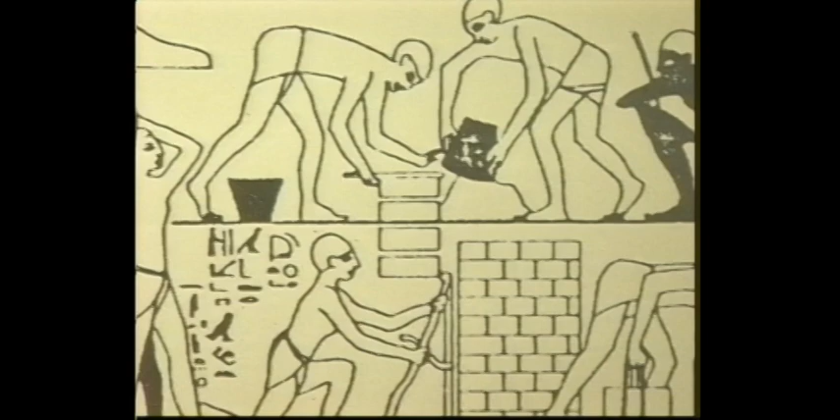This inscription reflects the historic depth of earth architecture. Nearly 5,000 years ago, builders here mixed soil and water, formed them into bricks, and dried them in the sun. This earliest and most widely used system of earth building evolved in sophistication and has created monuments which attest to the magnificence of what could be done with earth.

With the onset of the Industrial Revolution and the sudden appearance of towering giants of steel and glass, these treasures of earth architecture were filed away as relics from the past.

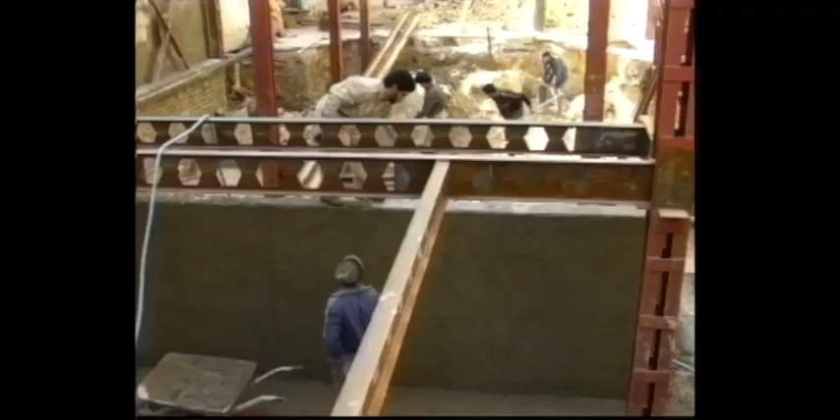Unlike the West, cities in the developing world had modernization thrust upon them without the benefit of long-term planning. Infatuated with the power and versatility of Western building technology, indigenous people began to look down upon their vernacular traditions as being symbols of their underdevelopment.

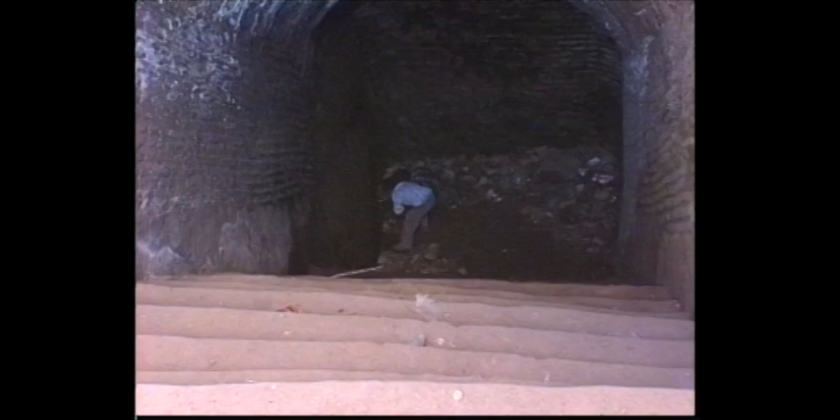Underground cisterns, with the thermal insulation of earthen material and the natural refrigeration of the wind catchers, store the cold winter rain, and in centuries past quenched the thirst of desert caravans in the summer heat.

Khalili wondered if these age-old techniques could be revitalized to address the shelter crisis and concerns for the depletion of our natural resources. In Iran and many places of the world, I saw that unfortunately the most beautiful earth architecture had been inundated, had been destroyed by modern type of architecture that was steel and concrete, and so inappropriate for the environment and the place, because people were all impressed that these were what the West has created, and they saw that as a symbol of progress. Therefore, they blindly imitated everything.

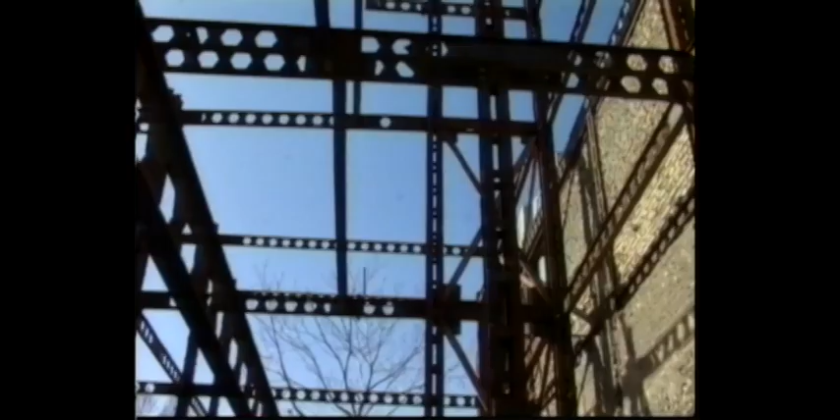Structures made with steel and concrete are generally unsuited for harsh desert areas because they create oven-like interiors in the summer days and provide too little insulation against cool nights. To make them viable requires machinery that taxes environmental and financial resources.

Earth homes, however thermally efficient, were plagued by other weaknesses. Main problem with the earth architecture was erosion in rain and snow, and of course earthquakes. And I was inspired for years by the possibilities of firing these buildings to become monolithic structures.

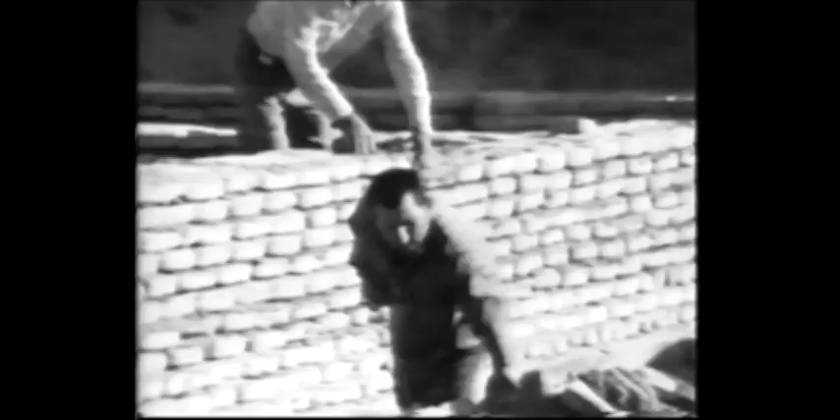And I went after these dreams until I came across a kiln, a brick kiln, a ceramic kiln that was standing there for centuries because the kiln was fired and glazed and it could resist. Therefore, the solution, the answer to what I was searching for years, was already at the turn of a road in a village.

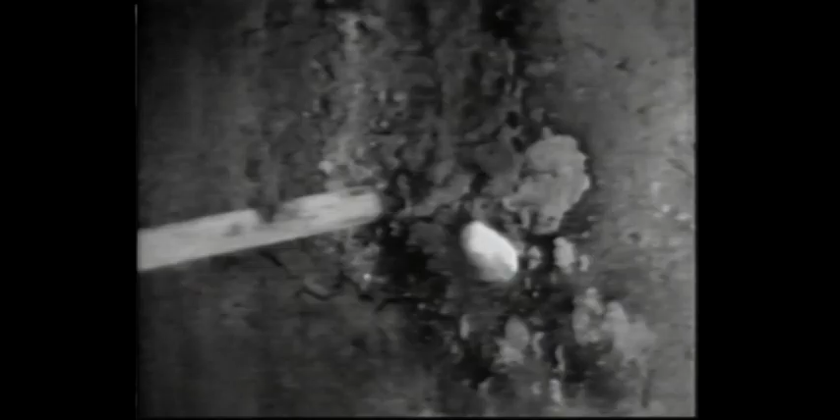After experimenting with the firing of small existing homes, Khalili worked with master masons to construct a 10-room school entirely of adobe bricks. Employing the available local technology, they used gravity-fed oil burners to fire the school for several days. This fired ceramic school has been in use for more than a decade.

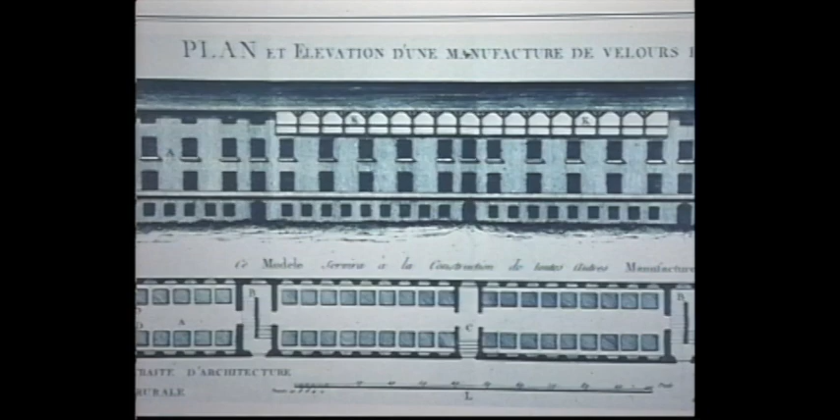The quest for the validation of earth as a viable building material can also be found in France. The 18th century pioneering architect François Cointeraux used the technology of his time to refine a system of building with earth called pisé, today known as rammed earth.

Mixtures of earth were pounded under pressure between wooden forms. The forms were removed, creating thick-walled structures. Driven by the enlightened goal of the French Revolution, Cointeraux envisioned rammed earth as a solution to the problems of building for the masses.

However, the very accessibility and simplicity of earth building posed a threat to the established practices and interests of his contemporaries.

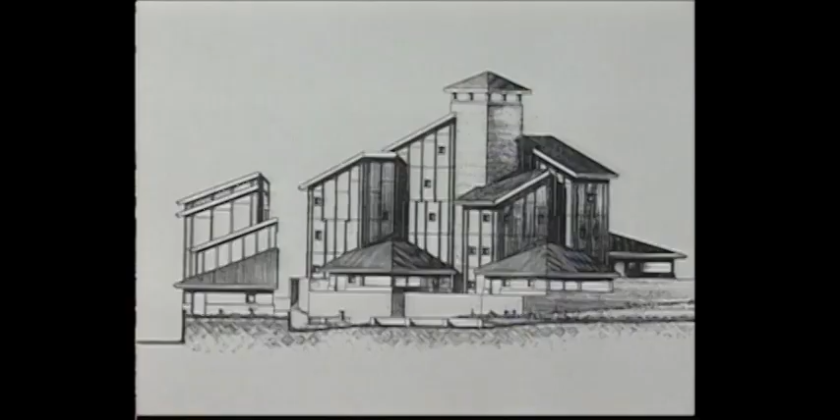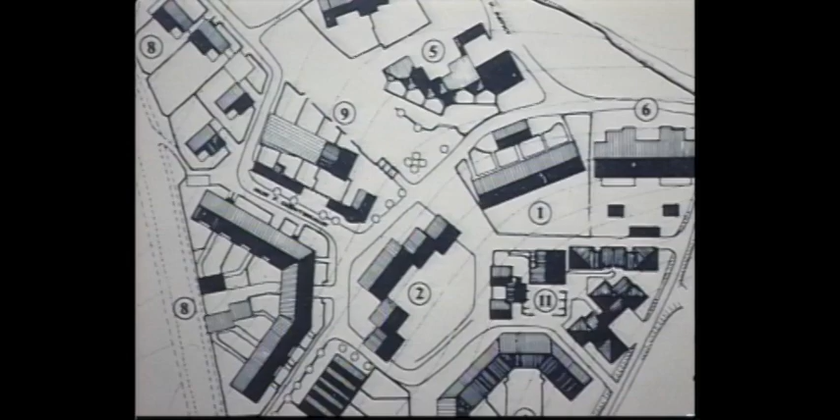When I was in the process of preparing the exhibition, then I remembered that and I said, we must build something here. It's not enough to say and to show that Earth has a future. We must demonstrate it. The Domaine de la Terre complex was designed and realized through the efforts of CRAterre, the French Center for Research and Study of Earth Building at the School of Architecture in Grenoble.

We became aware that without the industry, earthen architecture would go nowhere, except on a village level, etc. And this is quite new as well in history. This temperate region, subject to rain and snow, provides a working laboratory for experiments with improved earth technologies in order to overcome the drawbacks of climate and soil limitations.

These compressed earth blocks are quite familiar to many people - they're unfired. That means bricks produced by industrial means, extruded, don't have to be fired anymore, nor dried. Yet they have exactly the same characteristics as a fired brick, meaning 50% less energy for exactly the same product.

In this house, a sheet of glass in front of the earthen walls creates an insulating air trap. The sun's heat is absorbed into the walls by day and is re-radiated into the house by night.

What we can say here is that this architecture, its aesthetic, is quite the common one of the local architecture we can find in other neighborhoods. This is very important, in fact, because it demonstrates that architecture made with earth can be very common architecture, not a specialized architecture.

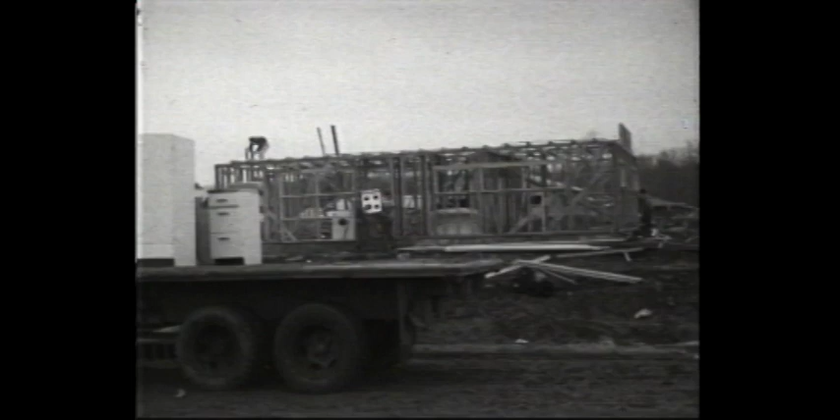Whereas the Groupe CRAterre is inspired by a rich tradition of earth architecture in France, European settlers in North America relied upon resources like timber to fashion homes in familiar forms, laying the foundation for a rapidly developing industrial society.

These are the 36 men who built this house. Another day, another 40 houses.

And yet, tucked away in scattered corners of this nation, there are various examples of earth architecture that hark back to the earliest indigenous inhabitants of this continent.

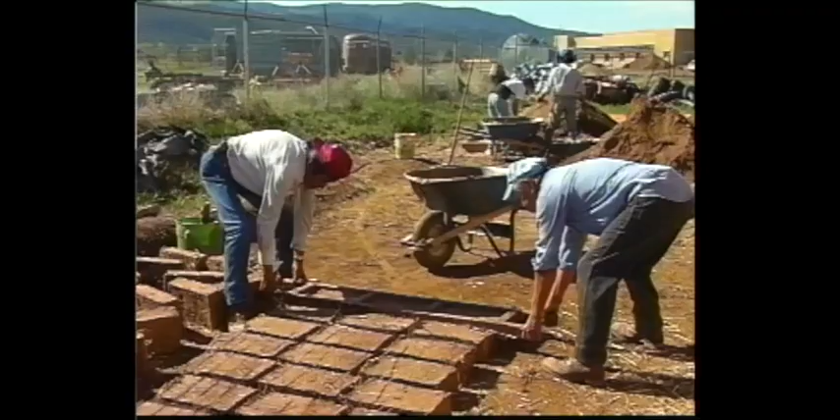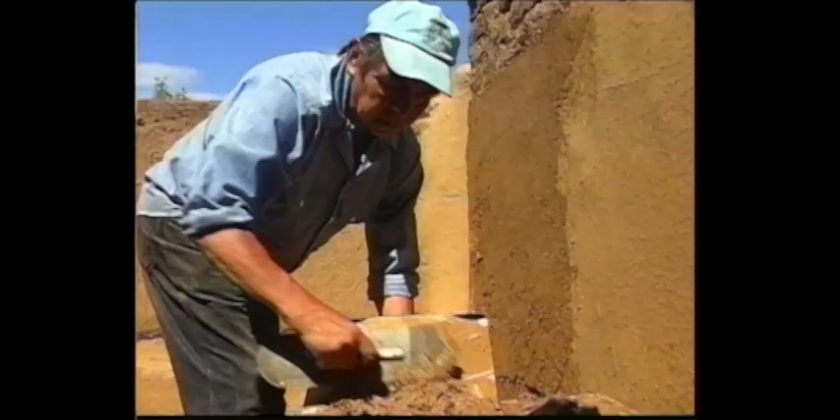For the adobe houses to live on, we have to take care of them like you would take care of a child. You clothe a child; we plaster the adobe houses so they can stand up.

Now we're going to go inside and I'm going to let you see the house that we had renovated.

Here, when you live in a house, it's almost like part of you because you live in it and it lives with you. If you keep the house warm, it'll keep you warm. And it's almost like if you die, the house will also die with you.

When you build a house, you build it with what you're actually standing on. Once upon a time, maybe there might have been a house there also, but the recycling of adobe material is almost like building what had been there once upon a time.

And here we find another authority, Mr. Norman Denny, Vice President for Materials of Levitt & Sons.

Mr. Denny, we see that you're using asbestos cement siding on your homes. Can you tell us why? Yes, these sidewalls help us create distinctive and attractive homes. They have a long life and a low cost of maintenance. And first, last, and always, our customers like them - and what they like, we like.

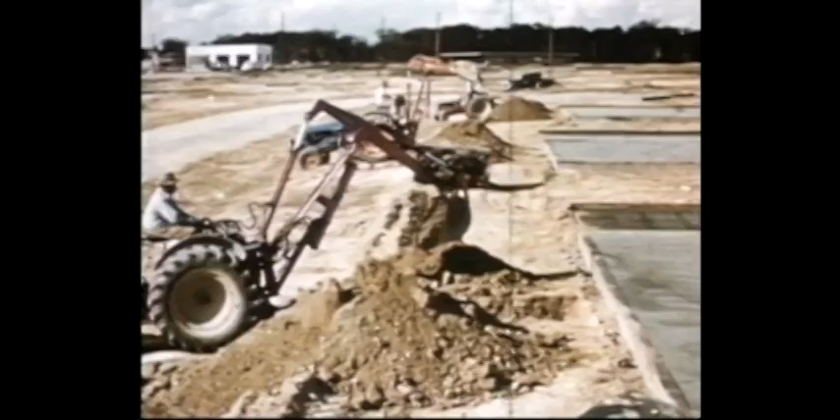In post-World War II America, the preference for single-family homes mushroomed. Rising to the challenge of this demand, the forces of industry and technology were harnessed, opening markets for the entrepreneurs who promoted newly synthesized building materials and the tradesmen who built with them. Ancillary enterprises such as insurance and mortgage banking became the backbone of the booming economy, creating a standard of living envied the world over. This money, the savings of all these people, when put to work in this way, benefits everybody. The butcher, the baker, the candlestick maker.

In the United States, a culture of consumerism and a misperception about the viability of earth hinder its potential acceptance as an alternative building material. There are many economic interests who see it favorable for their position not to have very much earth building occurring in the United States. That's the lumber industry, and in a major way, the cement industry. This is where their influence has affected the codes, because in these codes, earth walls are engineered as cement walls, courtesy of the cement industry.

One of the problems about adobe is that it's not considered a, quote, legitimate building material. In other words, by Western industrial standards, it's supposed to be soft. It's supposed to be so soft that it's dangerous to live in it.

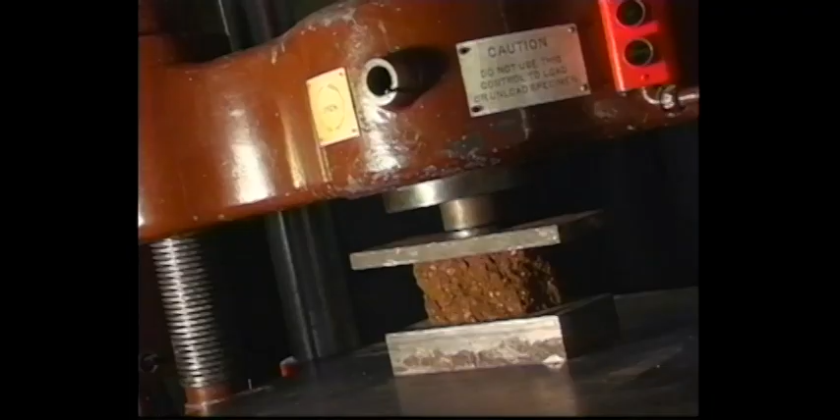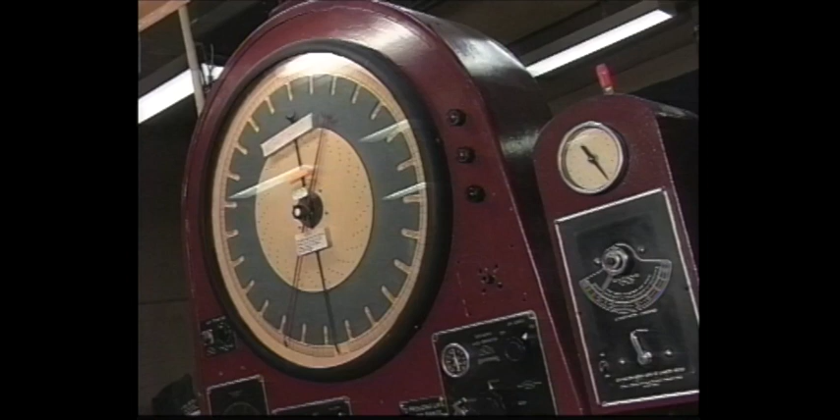This machine makes a compression test of adobe blocks. This represents the types of forces that are placed upon adobe blocks in an actual building. These would be the forces of the roof weights, of the weights that are induced by earthquake and wind on the building. These kinds of tests are what we need so that we can feel much more confident in using these materials.

Now, another test that's used is to take an adobe brick and subject it to tremendous pressure. If you subject it to hundreds of pounds per square inch of pressure, of course, it crumbles. But no adobe brick in a standing wall is ever subject to that kind of pressure.

So adobe is a system. It's not just a matter of individual bricks that you can browbeat one way or another. The field of adobes that I'm standing in has been semi-stabilized with emulsified asphalt, 3 to 5% by weight. Now with these modern stabilization methods with asphalt, you can build with it anywhere.

Another test that's used is to take an adobe brick and submerge it in a pail of water, and lo and behold, it dissolves. This is supposed to prove that adobe is vulnerable to rain. Well, it's kind of ridiculous because rain only attacks one side of an adobe brick at any given time. An adobe brick, by the way, is covered almost always with adobe plaster so that the water doesn't reach the brick at all.

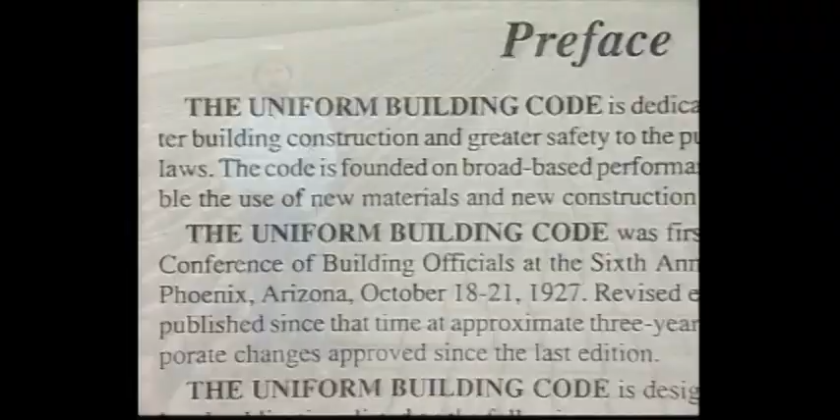I've stressed the importance of the need for California to reform its codes toward adobe and rammed earth. The reason being that most all states in the Union adopt their codes from those put together by the state of California, and it's adopted by the Uniform Building Code officials.

The provisions of this code are not intended to prevent the use of any material or method of construction not specifically prescribed by this code. Approval of a request for use of an alternate material, assembly of materials, equipment, method of construction, method of installation, or means of protection made pursuant to these provisions shall be limited to the particular case covered by the request, and shall not be construed as establishing any precedent for any future request.

Nowhere in the United States are the building codes and regulations more stringent than in California. Near San Francisco, in Napa Valley, David Easton has been working to advance the state of earth building and to establish the safe standards by which this material can be judged on its own merits.

I somehow felt, when I began to explore construction materials, that earth had a potential. Earth had a place in modern construction, and what I was able to add to the technology was some improved engineering, some Yankee ingenuity to take a successful material and upgrade it.

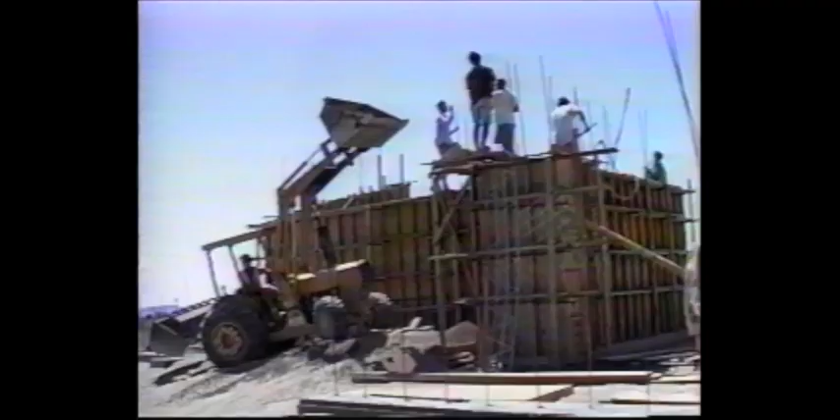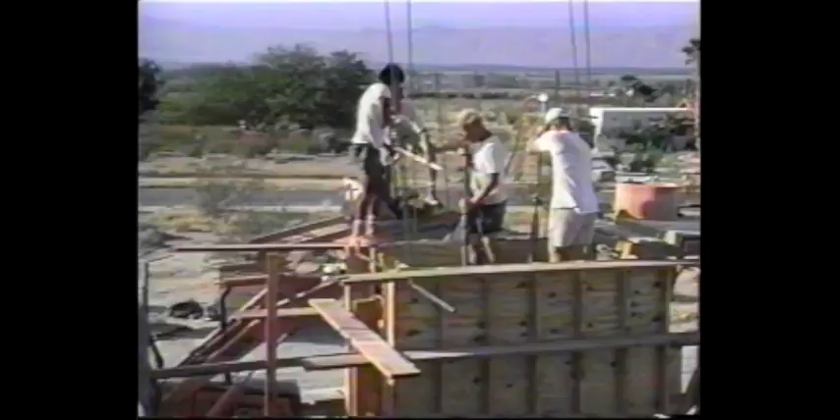David Easton works with the rammed earth method of construction, updating Cointeraux's techniques. Modern equipment speeds the process. The soil is mixed on site and then poured into the wooden forms. Pneumatic tampers compact the earth. The forms are then removed, revealing a 2-foot thick wall.

The wall is complete. It needs neither exterior shingles nor interior finishes. Skillful layering of the soil creates attractive, ready-to-use interiors. Rammed earth requires more complex technology than adobe, but can raise massive walls in a shorter period of time.

When the first rammed earth project was submitted to us for approval, we were obviously confronted with a product and a material that wasn't code recognized. So what we were faced with is, can we use it? And if we can, how do we use it and what limitations would we place on it?

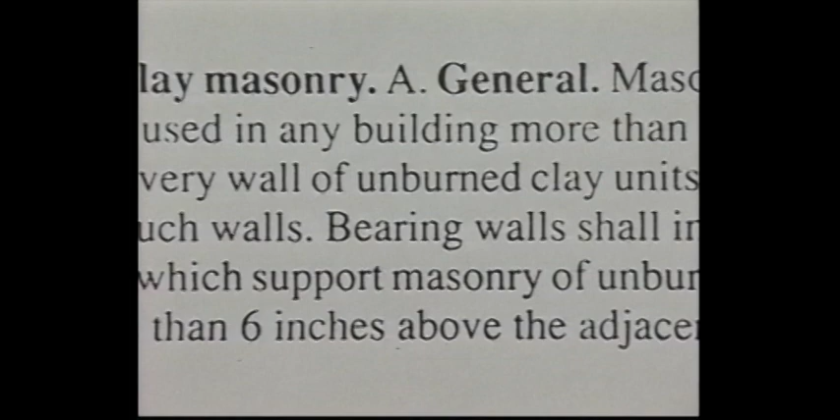Basically, we looked at it as a low-grade concrete product. In fact, earth reacts differently than a low-strength concrete. It's more of a plastic material. It's a very low-strength material, but with thick walls and low-rise buildings, you can design a safe, unreinforced clay masonry building.

I don't think this particular department is an enemy of innovation. Basically, we've approved rammed earth. It would have been very easy for us to take the position that since the concept is not code approved, go to Whittier, to the headquarters of the International Conference of Building Officials, submit your information, take 5 years, get your approvals.

ICBO certification is a procedure that has to fit into the larger scale construction industries. Big companies spend thousands, hundreds of thousands of dollars on research and development to bring a new material to market, a material these people are going to make money on. The problem with earth building is that there's no big profit.

It's a hard sell, is what you might say. Madison Avenue might call earth a hard sell.

The affluent community of Napa has provided the testing ground for David Easton's work. Here, facing the challenges of working with an unrecognized technology, he has managed to build numerous rammed earth homes for a growing group of clients. I met David Easton out of Napa and visited him in a rammed earth home.

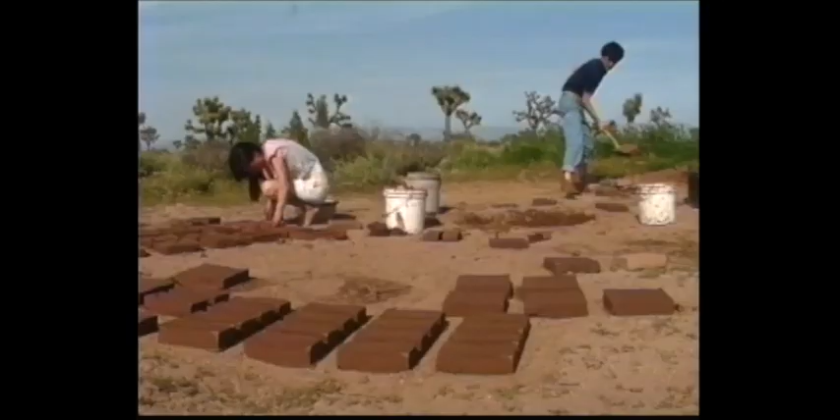The only way that you can convince the third world that what they have is valuable and great is to do it in the West, especially in the United States. Architect Nader Khalili, who left Iran after his experiments with firing buildings, has picked this site of harsh summers, winter floods, and seismic dangers as the site for his California Institute of Earth Art and Architecture.

The only way these arches stand is because of its balance. Balance with gravity, they'll stand with sand. And if they can build with sand, they can build with mortar very easily.

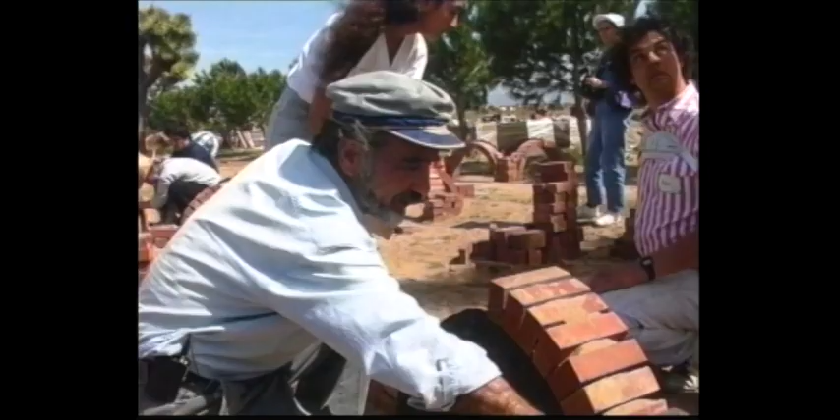Just right, notice how we both give in. If you don't have this buttress against it, once you pull out the form, it goes, because you need to have an arch with a buttress right next to each other. Go to the side, to this.

Okay, give yourself a hand. Ah, you have a hand, very good.

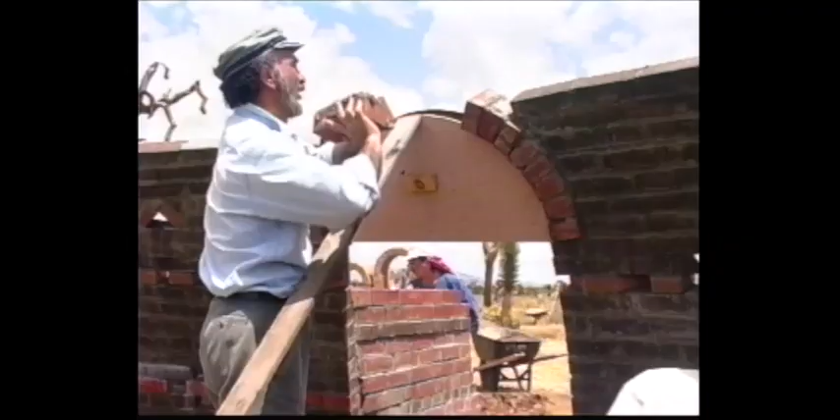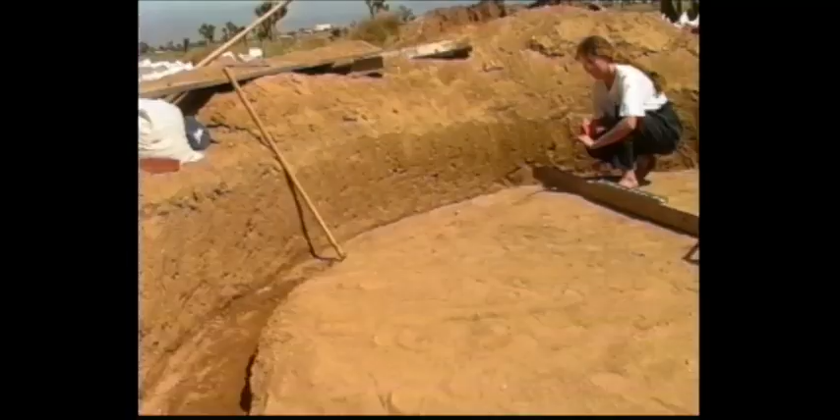Khalili, who strongly advocates using arch and dome forms so well suited to earthen structures, is experimenting with the base isolation method of dome construction to make these buildings earthquake resistant. With no conventional foundation, the dome sits on a bed of sand, buttressed by the sides of a 3-foot deep hole. If an earthquake strikes, the dome shakes on its bed of sand like an upside-down bowl.

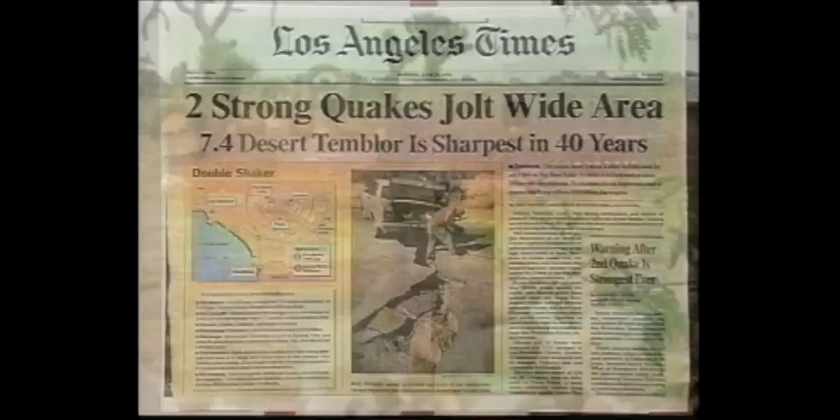In this highly seismic region, the real test came sooner than expected. The earthquake which hit was 7.4 magnitude on the Richter scale, less than 50 miles from here. Inspections afterward showed there was not a single failure in the structures, because of this uniform movement of the structure within the sand, relying on the base isolation.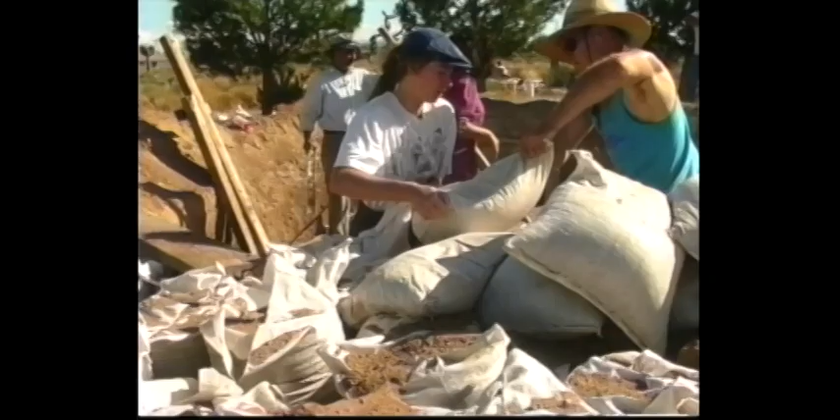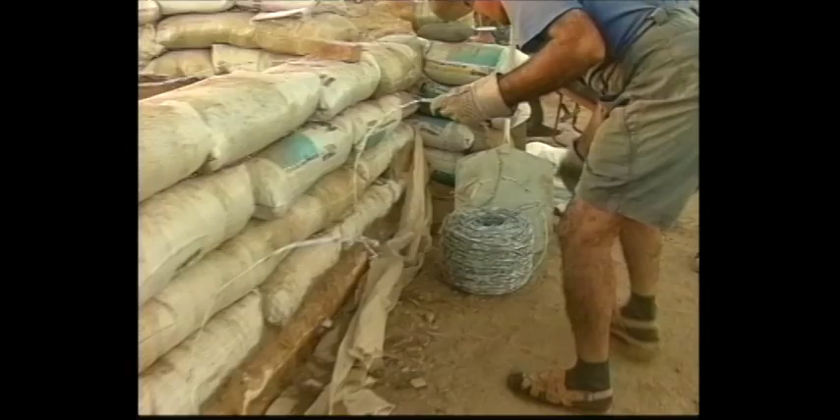To meet the challenge of building affordable housing, Khalili and his associates devised a system of using sandbags as building blocks. Stacked like bricks, a ring of barbed wire is then placed between the bags, serving as a tension binder for the structure. Finally, a coat of mud plaster is added to protect the dome.

The basic philosophy and idea here is, one, how to turn the military use of sandbags and barbed wire into housing for the people in the world. And second, how to use the lowest cost and simplest way of building with any material that exists at the site, any place.

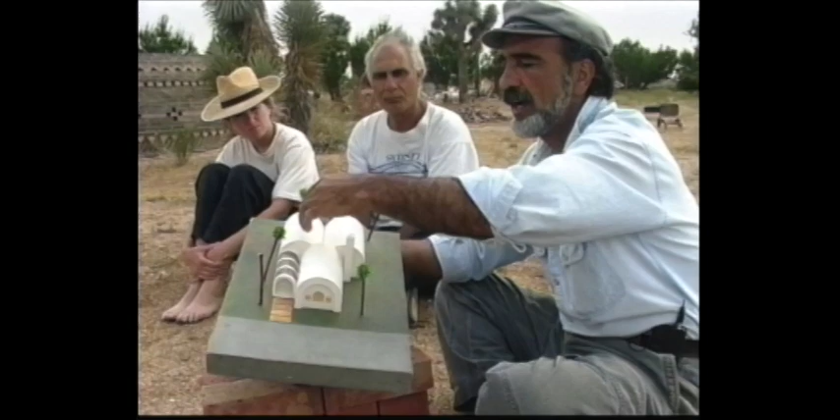Pioneers came to this country with the hammer and saw and some nails and built themselves houses. Now, everything that you want in a house, you have to go to the banks and the insurance company and loans and so on, because people have left all these to the hand of organizations. They have become more or less homeless because they don't know how to build their own homes.

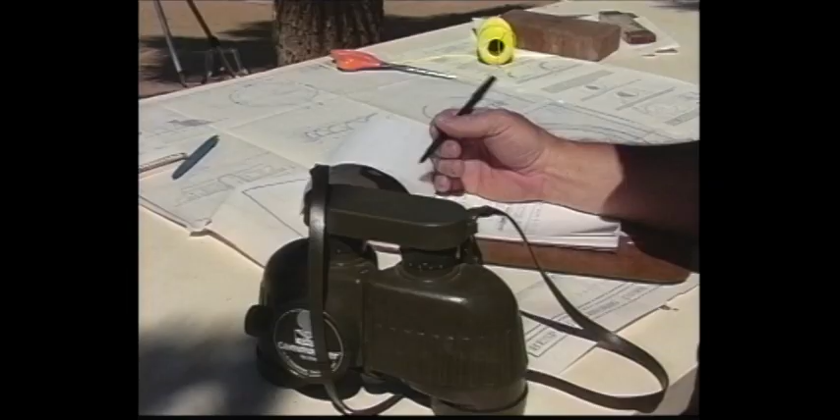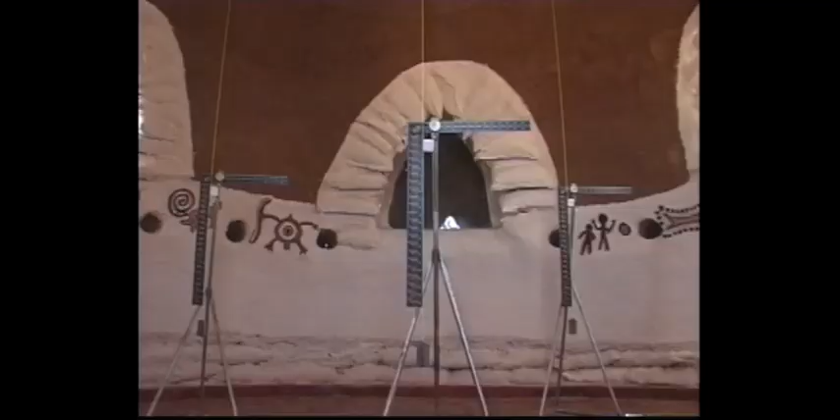To make these experiments into a viable reality, testing approved by the International Conference of Building Officials was carried out. The dome was loaded eccentrically with sandbags to simulate building loads, wind forces, and the shock from earthquakes. Unacceptable deflections measured against the plumb lines would indicate potential failure of the structure. The sandbags approximate 80 pounds per square foot loading, which is greater than the Uniform Building Code requires for this type of structure. So we're loading it and testing it about 200% greater than expected.

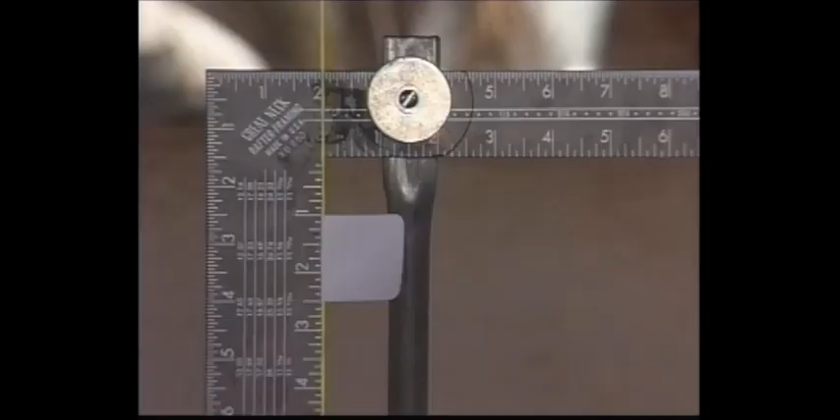For 3 days, Khalili and his associates anxiously awaited the result of the tests. It's okay, there's no deflections.

The acceptance of these prototype structures by the California Code administrators and their potential implementation in the West will perhaps inspire a renewal of earth building in the developing world.

This will become your living room. This is your dining room and kitchen. And here will be your solar oven. So in the kitchen here, you push out your food into the solar oven. And then here is your wind catcher that cools from a tower. The cooling comes here, the natural cooling system. And you go out here and you have a bathroom and a bedroom.

It's new and different, and that kind of makes us a little nervous at times, but in all honesty, it looks like it's very solid construction. Working with the Building Officials Conference, it looks like they have accepted the type of testing we're doing here. This obviously would open up hundreds of opportunities around the world for low-cost, affordable, energy-efficient housing.

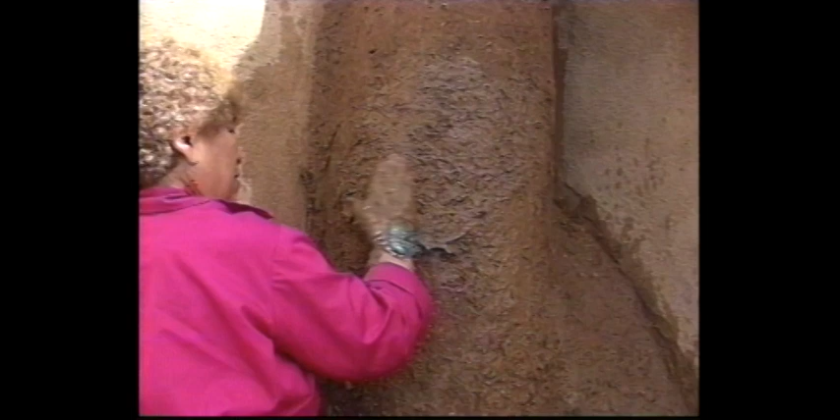From Cointeraux to David Easton, from Hassan Fathy to Nader Khalili, visionary pioneers in many parts of the world have struggled to revive and improve the rich tradition of earth architecture. The time has come to re-evaluate the prejudices towards this ageless material, to relearn the wisdom of the ancients, and see it not as the mere dirt beneath our feet, but the substance from which our future may be shaped. Perhaps then we shall truly be at home with Mother Earth.